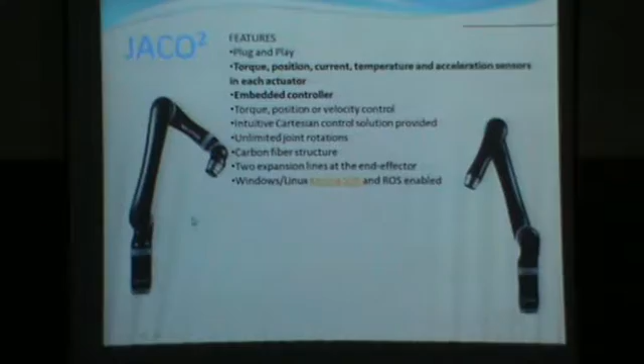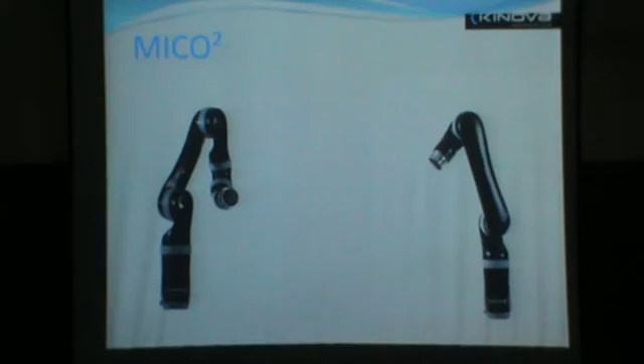They are very heavy. The MICO 2 also, it is just a scaled down version of the JACO. This is a 70 centimeter long robot, 6 degree of freedom. And the features, be it of the JACO or the MICO, they are almost the same. I somehow can't see the charts over here, but they weigh between 3 to 6 kg.

The payload is also between 3 to 6 kg. I'm going to keep brochures of the products over here, so you can get an idea. These are the two major parameters that they look for, weight and payload. So that is there. Weight is 3 to 5 kg, payload also. In gripper also you have got two kinds of gripper, 2-finger gripper and a 3-finger gripper. I'll show it in the videos.

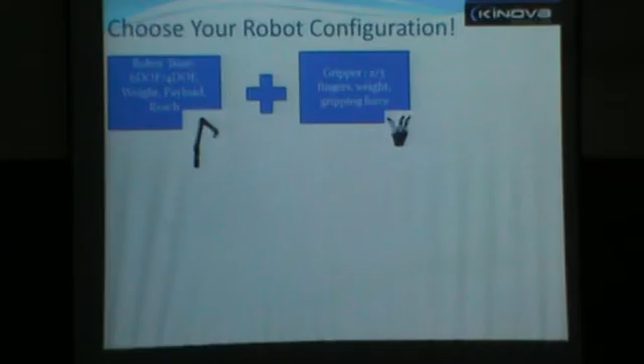So basically, while choosing a robot arm, you can choose, according to your application, whether you want a 6-DOF arm or a 4-DOF arm, depending on the weight, payload and reach. These are the three features. Reach is the maximum distance from the base to the end point, how far you can go. Then you can choose the gripper. It can be a 2-finger gripper or a 3-finger gripper. And then you can create your own robotic arm.

So there is another chart over here. So this converts into 12 types of robotic arms essentially. For the 6-DOF or 4-DOF arm, in JACO, you can choose these two variations, and you can choose without a gripper, in which case you have to build your gripper, or we can supply you with a 2 or 3-finger gripper.

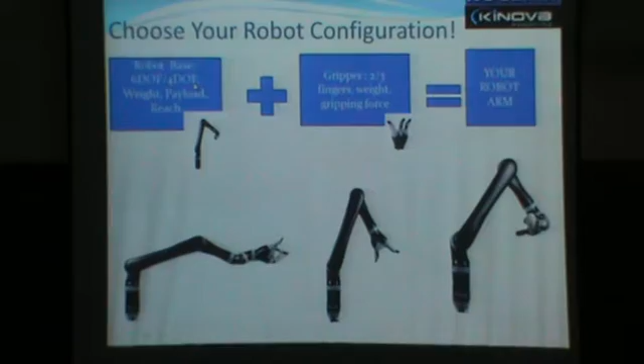Some more features. It is 5.2 kg. The weight, the payload varies between 2 to 5 kg. This is the previous version. It works on very low voltage, 18 to 29 volt DC, and this makes it a very high favorite for inserting it on top of mobile robots. Because on mobile robots you have two constraints. One is its payload. The second is the power.

You are drawing battery. So if you consider keeping a 50 kg robot on top of a mobile robot, your battery will drain in no time. As well as if you are carrying a huge weight, it might become unstable also. So it's very lightweight, very low power consumption. Base control programming is through USB.

You do not need to put this in a cage, where typically in an industrial robot, the controller is of 100 kg. In your robotics lab, you must have seen there is a separate robot, and it's not that open source also, neither in terms of software nor in terms of hardware. So the programming language is C++. The drivers are written in ROS, the robot operating system, which I'll come to in the next slide. It can be programmed through USB.

Now suppose you are not satisfied with any of the robots that we give, and you want to build robots from scratch. We also provide the actuators. These are the same actuators that are given as part of the 6-DOF and 4-DOF arms. So there are 3 types of actuators. There are load, speed. I won't go through each of them due to time constraint, but the data sheets are there. So the most important part of our robotic arms is we have given a torque sensor, position sensor, current, temperature and acceleration sensor in each and every actuator.

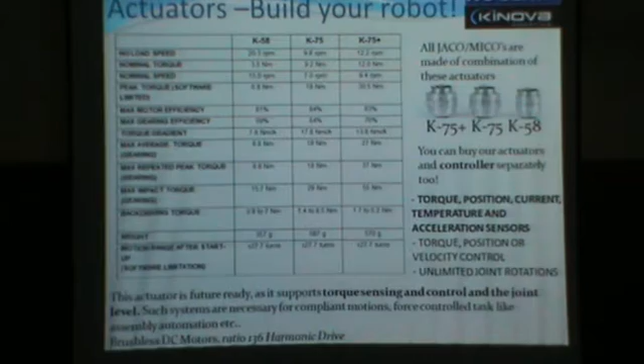So all the products that we give, they work on a library called ROS. I rather call it a library. It's called the Robot Operating System, and it's a huge library of code that is written in C or C++. It is being used by researchers and built by researchers. So it's a very research-friendly operating system. This can also work on Visual Studio or MATLAB. Cartesian and angular trajectory control is there.

You connect it through a USB, C++ language. So this is what the research edition platform comes in. You have got a robotic arm over there, a joystick, so that you can show it to the students while teaching very easily. There is a power supply unit to convert the 230 volts into 24 volt DC. The USB cable to connect your laptop and program its trajectory, angular control, Cartesian control.

It starts from basic chapters and then it goes to higher end chapters, including PID control. So all the code is open source. We have not hid any part for ourselves. API, and it's a very easy mounting kit. You can take it from the lab to your classroom, and from the classroom you can put it on top of a mobile robot in case you already have a mobile robot in your classroom.

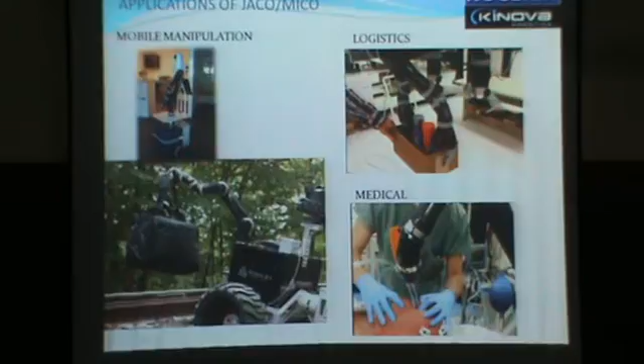In India, it is being used in brain-computer interface at Jadavpur University, Calcutta. One person recently completed his PhD based in brain-computer interface. He is using an EEG headset on his head, and through that he is controlling this robotic arm. I'll show you the video later on. And they have gone for another robotic arm recently.

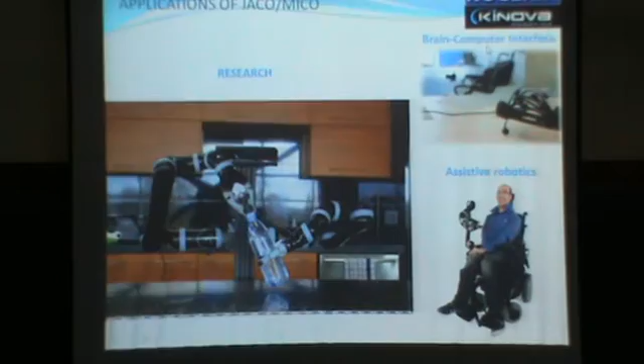So this is the basic architecture. There are lots of robots. I have given you a form. So I'll just tell you the basic difference. The basic difference between all of them is the payload. Other than that, the architecture that we follow is simple. It's going to be a rugged outdoor mobile robot where you can test algorithms, where you can perhaps put it in mines, or as Amrita University is planning to do, use it in disaster response management.

So basically, the architecture is like you have got a mobile robot, you have got an onboard CPU with ROS drivers installed in it. So the basic part of getting a robot and making it work with some of the other sensors is taken care of. We are not necessarily the ones building the drivers. Sometimes the drivers, since they are all open source, are built on the website, and sometimes we integrate them if we have got something special.

And there are lots of accessories: camera, GPS, IMUs, inertial measurement units, lidars. I'll come to that later. So these kinds of platforms we provide, completely integrated. So the advantage of using these open source libraries is somebody has somewhere tested it or tried it elsewhere. You can use that, you can build on it, and you can also put your work back on the ROS platform. It's like any other open source website which you can take advantage of.

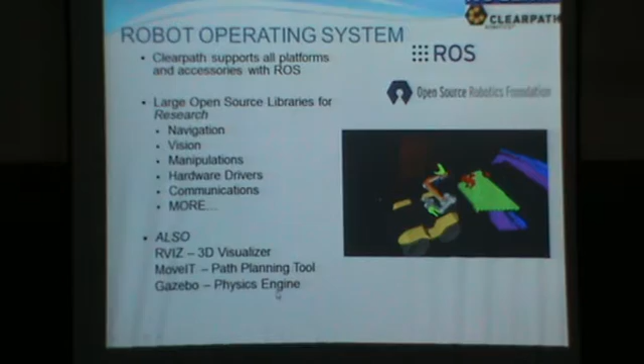So there is a large open source library for research, navigation, vision, a large number of manipulators, drivers for communication in case you want to increase the range of this robot from 100 meters to 1 kilometer, 2 kilometers. You have got repeaters, 3D visualizers, path planning tools, physics engines, even simulators are there. ROS Sim or some, that was one of the names.

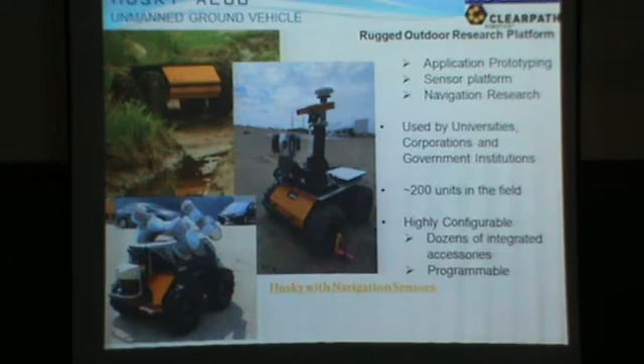So this is the Husky robot that we provided to Amrita University and IIIT Hyderabad. So these are some pictures, and just quickly, this is just to show how highly configurable they are. There are different sets of sensors each time.

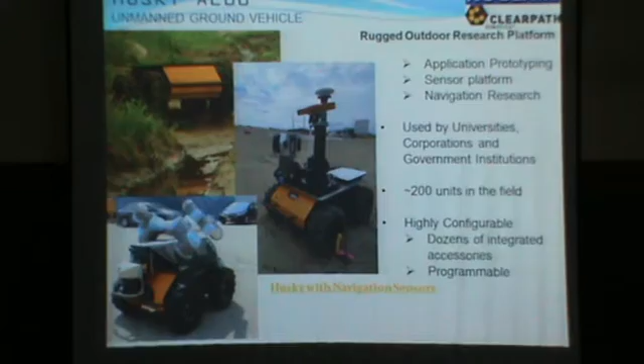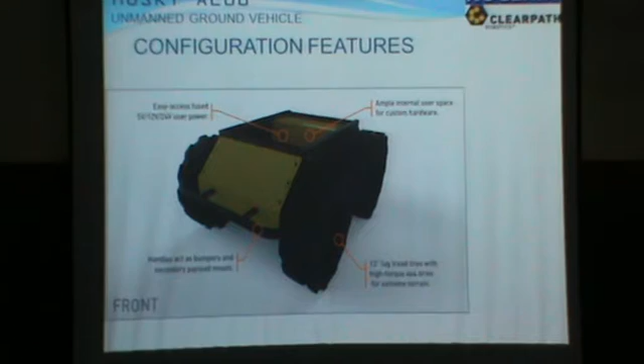So some more features. If, after taking the robot, you want to add your own sensors, we have made it very easy. We have taken out the power sources and we modified the top plate so that you can integrate additional sensors from outside. We give additional Ethernet ports also to the robot.

So industry rail mounting, class leading 5-inch ground clearance. There is also an emergency stop. Yesterday Mr. Alok Mukherjee was speaking about the importance of having an emergency stop. One of the robots just kept on running and went into the water. So we also provide wireless emergency stop buttons.

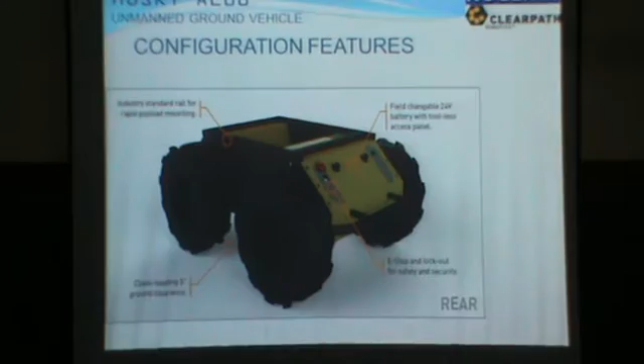It's excellent in terrain handling. You can see it near the beach and many other parts. So these are the more features, which again you can see more in the brochures I will give. But mainly they vary in payload. Rest all, integrability with ROS and everything is the same. So this has a payload of 75 kg. Works on ROS. By just the hand I am going to show it. It is this big. The Husky robot.

The Grizzly is a big vehicle. It has about 600 kg payload. The Jackal is the smallest one, low cost outdoor mobile robot that we have built. It has a payload of 20 kg. So this is completely right out of the box. We have also integrated already some sensors in it, mainly a GPS, an IMU, and an accelerometer. So some basic sensors are integrated.

We can also integrate some low-cost cameras if you want to. So this is pretty good for research. It is being built as a lab teaching tool, so there will be lots of tutorials that will come with the Jackal mobile robot. So sample applications are multi-robot systems. Since you are working on ROS, your whole lab becomes scalable. Suppose you buy one robot and you buy another robot which also works on ROS. As long as it works on an open source operating system, you can make one robot talk to another.

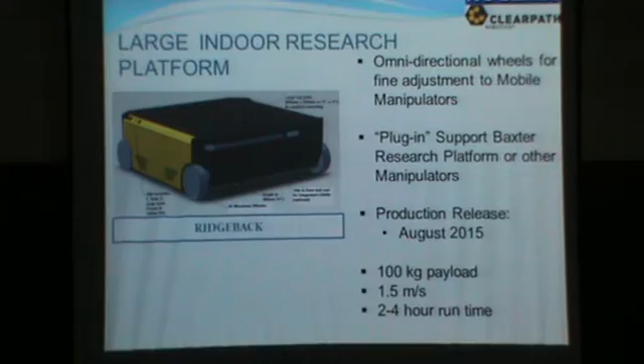This comes with a basic Kinect sensor or an Asus sensor. The max speed is about 0.65 meter per second, and you can do local things like maybe getting a glass of water from one place to another. But this is good for opening up yourself towards the world of ROS and robotics, basic mobile robot. It is also used for navigation algorithms at many of the universities, even in India.

Mobile manipulation. So the two things combined. One is the robotic arms part, which is the manipulators, will sit on top of the mobile robots, and we also integrate sensors and all that. So you have got a mobile robot on which we can put various kinds of cameras, GPS, inertial measurement units. LiDAR is very, very important these days.

So the difference between a camera and a LiDAR, in short, is when you give camera data to a computer, you will see the thing in 2D. But we are seeing it in 3D. So when I look at all of you, I'm not looking just at a picture, but I know how far you are from me, each one of you. So I have got a 3D map in my head about where each one is. So when you put on top of your mobile robot a 2D LiDAR or a 3D LiDAR, you get a 3D map of the environmental surroundings.

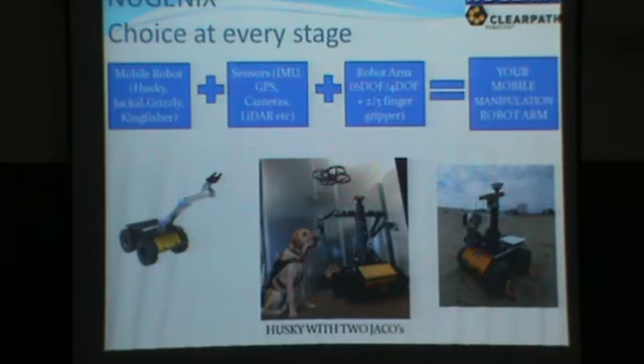So you've got a choice at every stage. So when you're building a robotics lab in your college, so that researchers can use it over a long period, it is very important to have flexibility. Otherwise, what will happen is if the mobile robot talks a language which does not talk to your robotic arm, then these are two separate solutions. You buy one robotic arm, you teach the things related to robotic arms, and then if you want to use the same part on a mobile robot, you cannot necessarily use it if it is a very heavy robot.

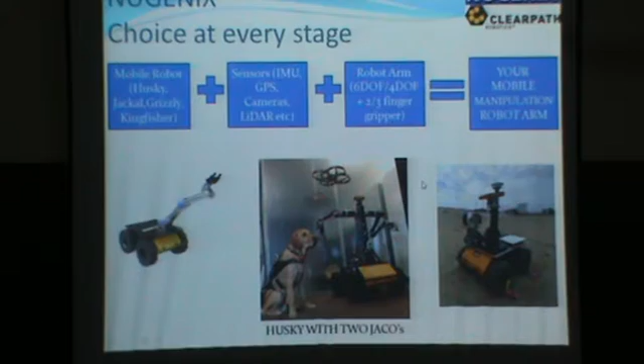Of course, industrial robots are also useful, but if you're thinking of doing research related to algorithm development or mobile manipulation or all the other applications, which are also industrial applications, but more to do with mobile manipulation, then you have got flexibility. You can choose any of the Husky, Jackal or Grizzly mobile robots that will talk to any of the robot arms and also the sensors.

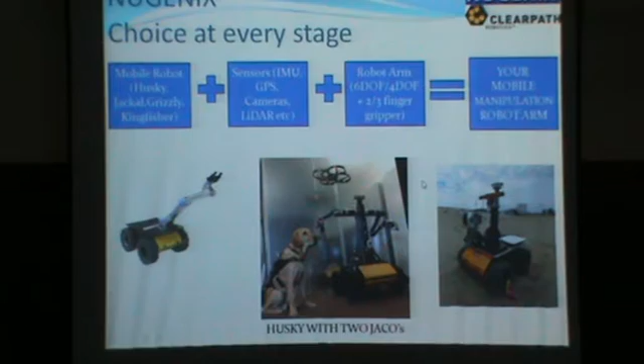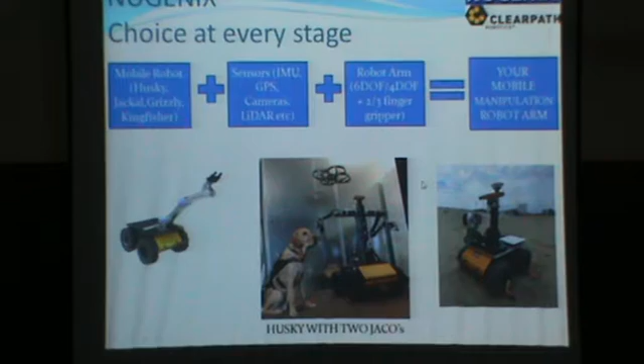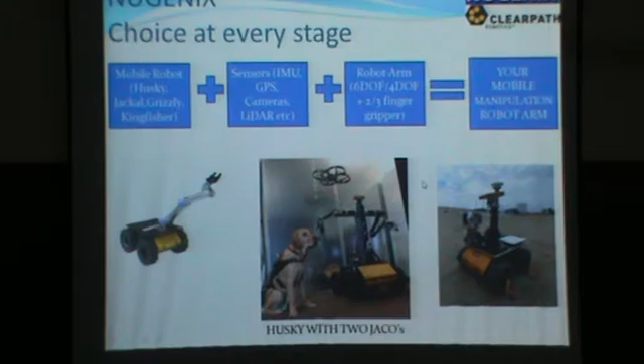So you can remove the robot arm or any of the sensors from that platform, take it into the lab where someone from the mechanical engineering department is teaching robotics, take it back to the researcher who is using it. And even the sensors, camera, GPS, LiDAR, these are used by departments from electronics, electrical, computer, any of them. So remove it, place it back, that is an advantage. It's not a repetitive thing.

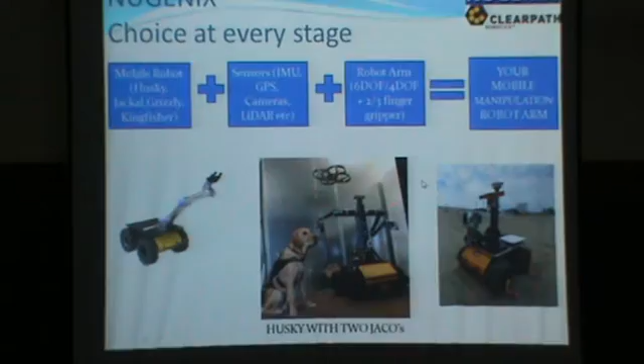So in summary, we basically provide anything and almost everything that is related to robotic arms and mobile robots. So mobile robots, sensors, cameras.

So I had this robotic arm a month ago. I'll be having it later next month again. So if you want to see a demonstration, I can bring it probably in the next month again.

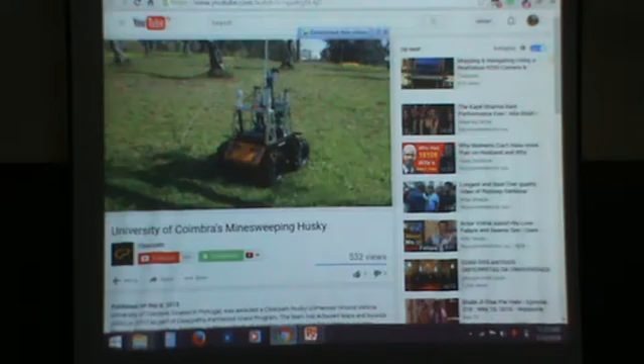So this is another robot, the Husky. This is used by the University of Coimbra in mine sweeping, at places where humans cannot go. So this is all on YouTube. There are many other videos also that you can see. This is the demining part.

So depending on your research work, it could be a basic starter package in which you know what kind of sensors you want to integrate and you integrate them yourself. Or it could be an explorer package where we put maybe a GPS or a camera on top of it. There are 4 or 5 packages in each of them. In a manipulator package, we will put a robot arm on top of this. And it's not necessary that you have to immediately go for the manipulator package.

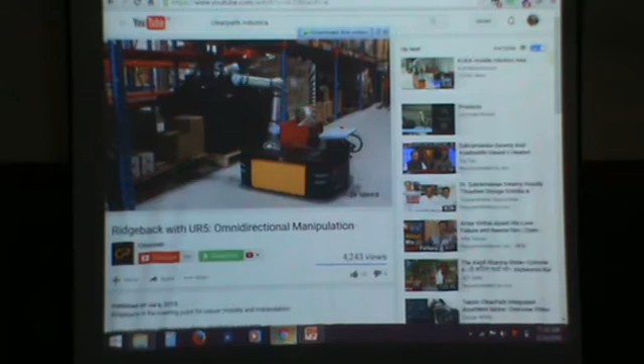In India, as of now, industry going to colleges and saying, you complete this project for us in this amount of time and we will fund you this much, that environment does not exist yet in robotics. ClearPath Robotics and Kinova Robotics are both examples which started in the university by some of the professors.

That is an option. From this year we are going to start sponsoring some robotics projects which are useful to the local industry where I come from. The textile industry is there in our area, and also home automation. So these are two areas where we are sponsoring some projects.